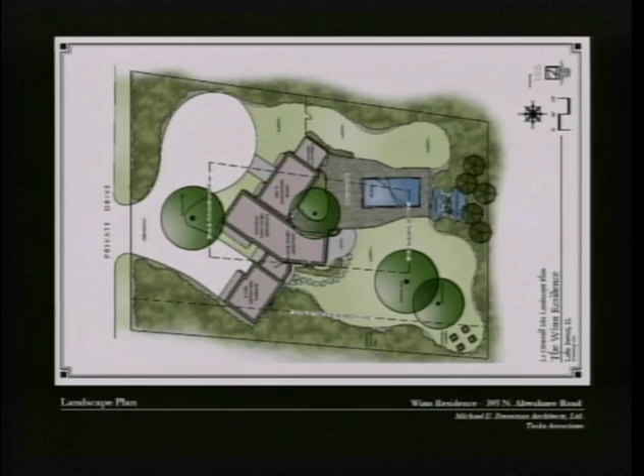Here's the addition itself. It's essentially front entrance, rear entrance to the backyard servicing the pool. It's linking the garage to the kitchen. It's also a secondary powder room, bathroom, informal mud room. The bathroom also services, we hope to service the pool that's in the backyard.

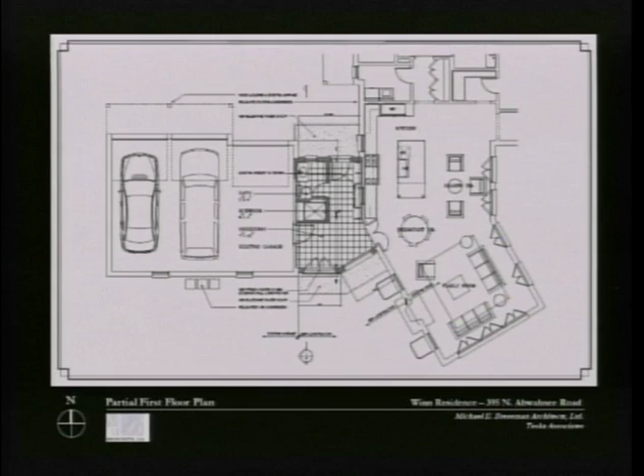This is the existing addition that was added on in 2004. The front elevation to the private road, this is the existing 3-car garage. They have this kind of, it was designed nice little portico in front with a slightly curved roof.

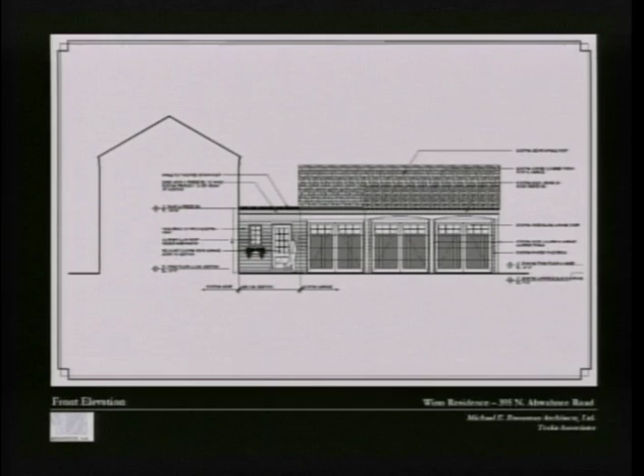This is just kind of a section through the addition to bypass the front part of the house. And then this is our linking element. You can see here the same frieze board that lines up with here, that it's a flat roof. And it's subservient to both of the structures.

The rear of the addition is here, the existing 3-car garage, the family room that kind of juts off and follows the 50-foot setback. And then the addition itself, essentially a pair of French doors. We're keeping it simple, punched openings.

It's the south elevation, so that linking element will have nice southern exposure and be bright and airy for the Wises.

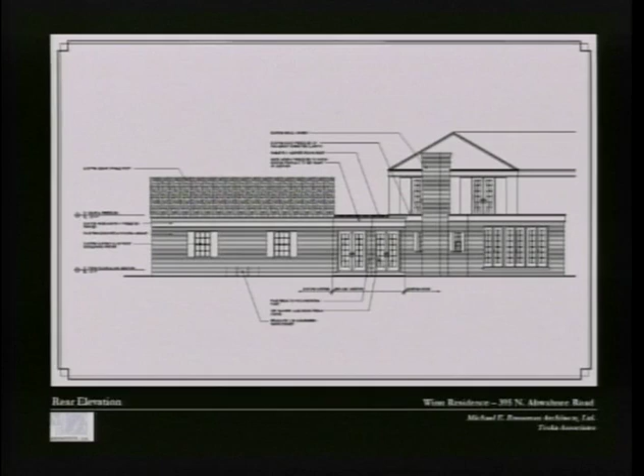Just a quick section. You can see here that it's flat roof, that the gable beyond of the garage is still going to be exposed. It's not going to be covered up.

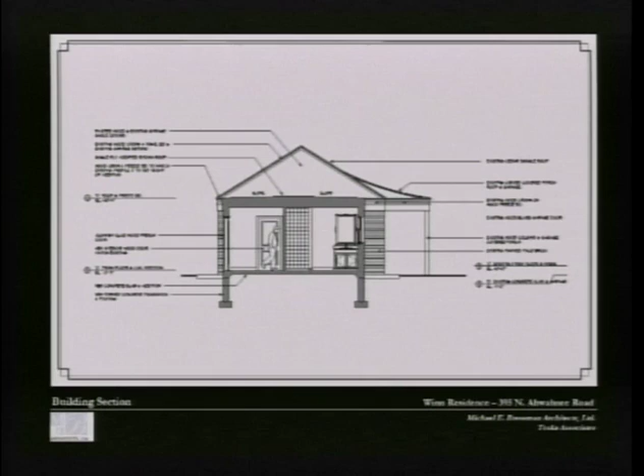The detail with the frieze board, it's a nice, clean, simple connection. Again, the whole purpose of this addition is to provide the function of connecting the garage to the house, but to essentially go away and not call any attention to itself.

And a whole series of pictures here. I just wanted to point out that there's a series of 4 homes here, I believe, maybe more, that the frontage is onto Deerpath. There's a long stockade fence that you can see here.

These are the neighbors here. You can see that even in the dead of winter, when I just took these recently, that you really can't even see the existing houses.

Essentially the addition that we're proposing is not going to be seen by anyone. Some of the pictures down here, the one neighbor to the west, I believe it's, these pictures are all so small, I think it's right over here.

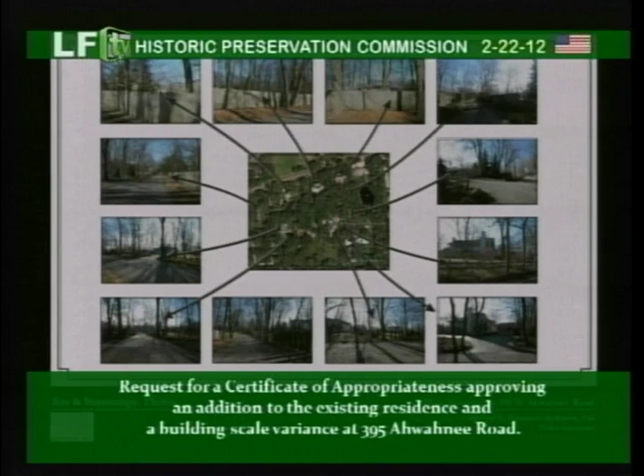Essentially where the garage is now is going to block the addition. So the visual impact to that neighbor is he's seeing the garage, he's still going to see the garage. And so we're trying to be as conscientious as possible.

And that's it. Great. Thank you.

Thank you. Do we have a staff report? Thank you, Chairman Pairitz.

I'll keep my comments relatively brief. Just wanted to mention that the petitioner has been working on this project for several months and has carefully looked at different options on the site in order to accommodate a bathroom and a changing room for their pool and look for a way to accommodate that space on the property.

After looking at the pros and cons of a detached structure in different configurations of the current design, the option before the commission is a connecting link between the main house and the garage. It has a flat roof and is set back from the face of the existing structure, as was mentioned by the petitioner this evening. This option does require a zoning variance from the Zoning Board of Appeals, but it appears to be the least obtrusive to the site and surrounding properties. The zoning board is scheduled to review this item next Monday for approval.

The request before the Historic Preservation Commission this evening is for the design of the addition as well as a building scale variance. The existing home is just slightly under building scale requirements. This project, I believe, is only 190 square feet and pushes it slightly over the required square footage.

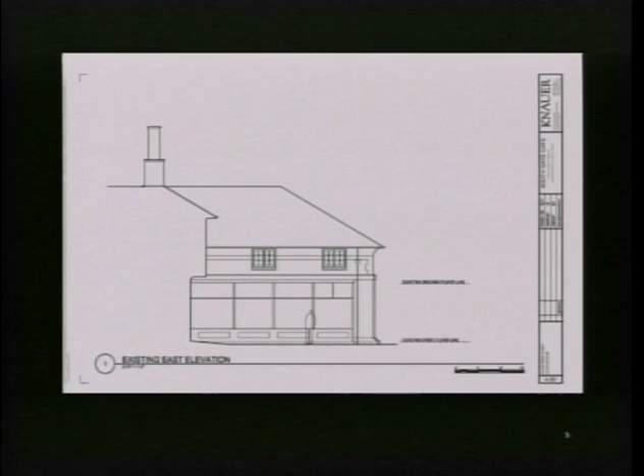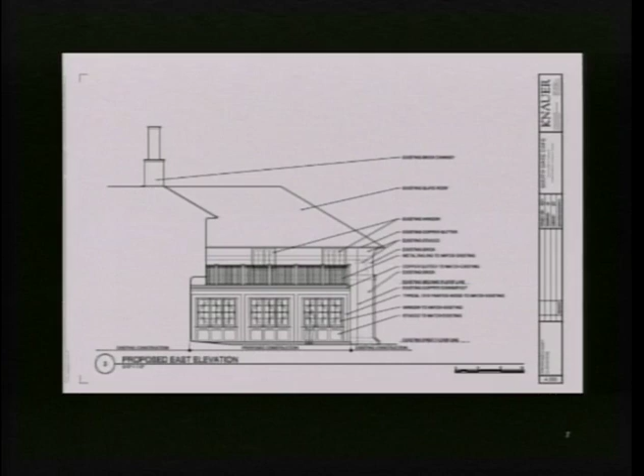As you can see on the proposed elevation, what we are trying to build here is nothing but a match of what was built in the 1986 or 1996 addition, which is seen right here. So it's a replica of that. It's a single story, but a better, more stable structure than what it is right now.

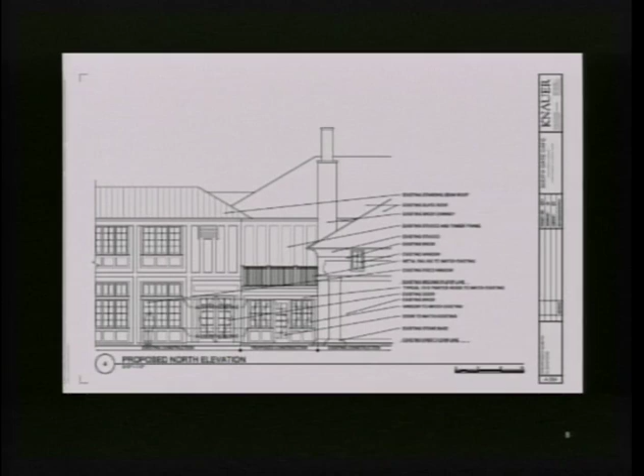In addition, the roof is a flat roof, and what the owners of the restaurant would like to do is use this as seating, which you enter from this door. So as you can see, all the existing is maintained.

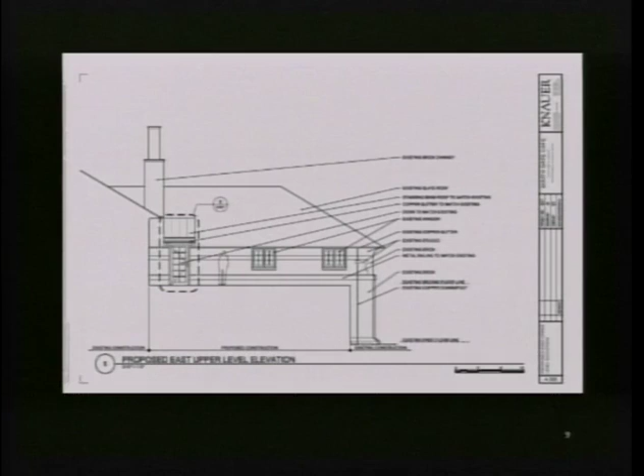The stucco, the brick, the roof line, nothing is altered. There were three existing window openings; one of them we are using as a door access to this deck area. This deck actually faces the market square across from it.

This is just more of the same, the sectional elevation view and some details of this door I was referring to. Due to the height restrictions, we are raising a roof with a dormer, and again the roofing material matches the standing seam roof that the addition is built out of.

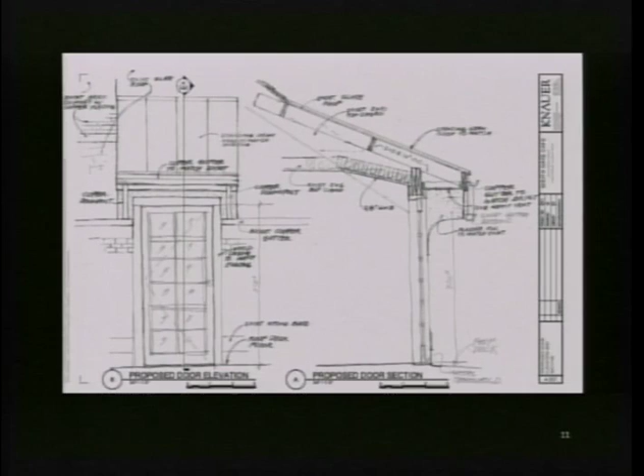The rest of the proposed materials for this addition matches the building: the windows, which are aluminum clad wood windows, the trims, the paint color of the trims, and the stucco. So more or less, the addition on the first floor is going to look like this.

I don't know why it's going away. This is one of the primary reasons for the replacement of the garden room, that it's really in bad shape, and I guess all we are proposing is to replace it with a better structure.

All right, well, I'm sure we have some questions. Why don't we have the staff give their report, and then we'll follow up with some questions, and that'll give your cohort an opportunity to get organized too. So, okay, Kathy, do you have a staff report for us? Why don't we do that?

Thank you. First, I'd like to take this opportunity to introduce the new owner of South Gate, Mark Westcott. The project as proposed is really a long overdue replacement. In 2007, the commission saw a very similar project to remove the garden room and replace it on the same footprint. At that time, there was some discussion about detailing that would better match the rest of the existing structure, and I think in this proposal that detailing has come forward.

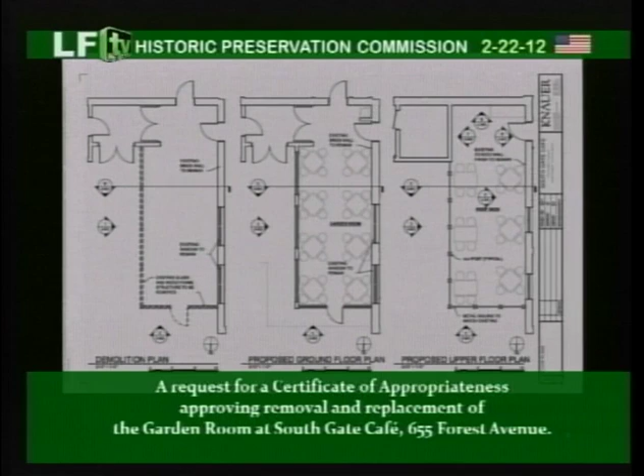I got it. So that doorway is actually quite secluded from the eye - it's hard to see that door. Oh yeah, we really won't - it'll be kind of right in there. So you're walking kind of to the wall when you're coming out of that door.

Any other questions for the petitioner? So that door then - actually, I think behind that door, if you go back to the elevation you had, that was probably more fun, the one that shows the door. I was just up there last fall, I think we were in that room - is that one of those little gathering rooms?

Yeah, and you rent that out on the weekends to various groups to have some kind of an occasion. In fact, people have wedding rehearsals too, I think, and rent this out. So that's one of the things about the second floor that's not as elegant as the first level - you get all that great outside market square interaction. So now with that door, in reasonably fair weather, people that are cooped up in that room can spill out and have that roof-type cocktail and look down over the square, and out-of-town people can go, 'oh boy, I gotta come back and shop, spend money, right?' It's kind of like our version of the Cliff Dwellers Club, you know?

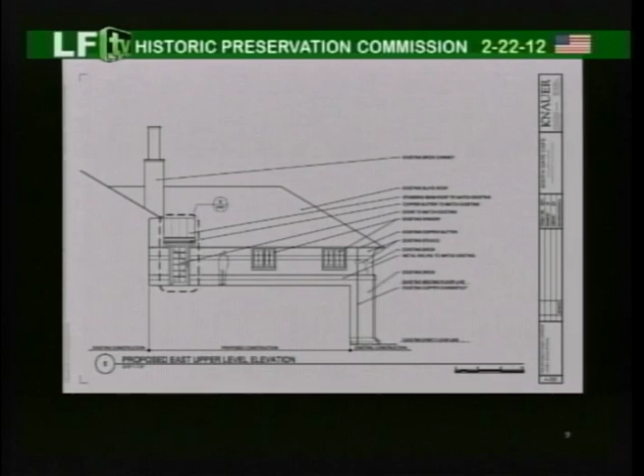It's very interesting, okay? And you're gonna definitely put that door in then, that's part of the proposal? Yeah, that's part of the plan. Not only that, if you've ever walked up those stairs from the bar room to the Market Club, there is a wall around that stairwell, so it's very confining, a little 3'6" stairwell. Well, we're proposing tearing that wall out and opening all of that space up so it becomes pre-function space that links the Market Club to this outdoor area.

So when you're standing there, it ties all of this together - you'll be able to see up the stairway, is what you're saying. Yes.

Like an exposed stairwell in a house, with a railing around. Oh, how interesting, yeah. That's very... I'm getting a little off topic.

The only thing that kind of strikes me as curious is that the whole structure added on to the south has a standing seam roof. The existing building where this doorway is has a slate roof, but you chose to use the standing seam roof over the doorway. Yeah, it's too flat.

Too flat for a slate roof. What we didn't want to do, it would be copper, the same material as the flashing on the building, and it would age over time like the rest of the copper flashing. It won't be perfectly green the first couple of years, we all know it turns brown then green. But that roof, when you look at the section, is just too flat, and it was awkward to try to get a higher pitch to that roof to take it.

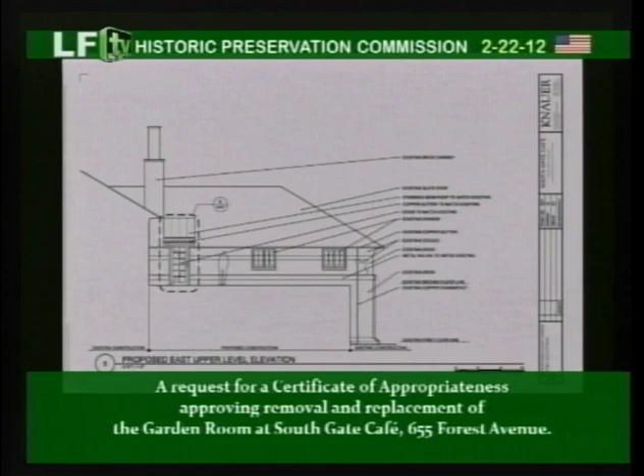What we're proposing on the other side is actually using trifold windows so that the whole opening opens. So when you're sitting there - there's a system we've used, I can't remember the name - but all three of those windows push to one side, and so you're sitting there up against the low knee wall, and you feel like you're part of the outdoor dining.

So that's the idea. Is that what they do in Miramar and Highwood? They have doors, essentially, don't they? Yeah, they have doors. Those are actually doors. Oh, they're doors. These are windows on a knee wall, so.

So any screens on there, or will you just have them open? No. And any plans for plexiglass like you have over the bistro - you know, the glass in the porch? Yeah, because in the winter these close and seal well, and they have compressible seals in the casings, so you don't have to worry about that.

And same with the top, you don't plan on enclosing the balcony up there in any way? No. I don't know how you would, but just wanted to ask. Okay, I just had another question too - is this a slab on grade, or does it have a foundation?

Oh, it does, okay. But it's slab on grade, there's no crawl space or basement. Not that I'm an expert, but I had lunch there last week and noticed some settling and leaking, and I'm wondering if there are requirements for a certain foundation to handle that load above. There would be a footing, and it's shown as a footing, so that should be sufficient. It's likely not on a footing now, probably was a patio that was just enclosed. Actually, there is a footing there, and the best thing about what's there is the slab and foundation. The rest has deteriorated, but the actual slab, the concrete, is in great shape. That's interesting, that's the good news.